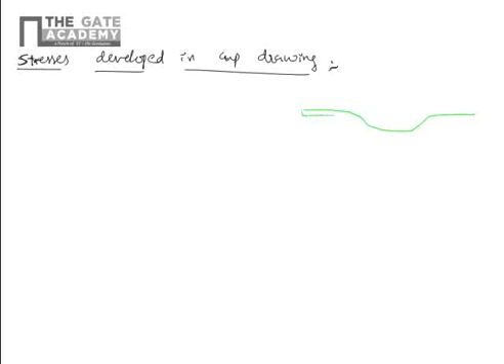Stresses developed in cup drawing at different positions of the operation. Suppose for example, I want to produce a cup. So this is a sheet, and this is a die.

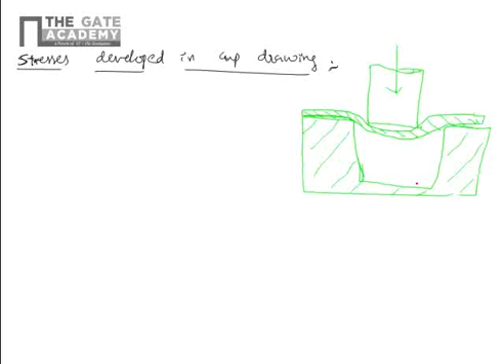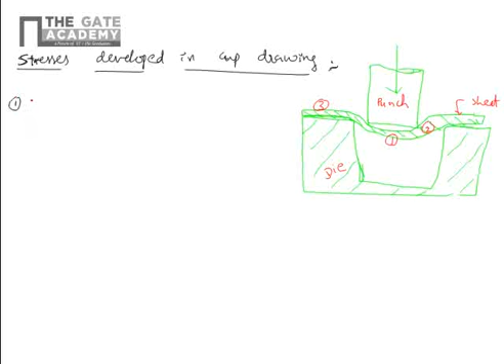It will give a cup. This is die, sheet, punch. So here there are three zones, 1, 2, 3. First zone is called zone 1, or area below punch.

So what are the stresses developed with blank holding force and without blank holding force? What is blank holding force here? Blank holding force is used to overcome, whenever you apply a force on the sheet, the sheet on the flange portion, which is the third number shows, this will lift up, it will lift upwards. So to avoid the lifting of the sheet whenever you do drawing operation, we use blank holding force.

External force is applied to hold the flange portion, not allowing it to lift out. If it lifts upwards, wrinkles will start forming. Once it is forming into cup shape, the entire wrinkles will be formed.

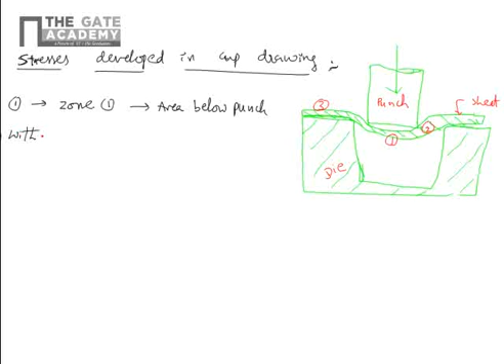So stresses induced in zone 1, case A, without blank holding force: if you are not giving any blank holding force on the flange portion and you are applying a load on the punch, then no stresses developed at region 1.

With blank holding force, what will happen? You are applying load on the punch and you are holding the sheet slightly, not with very hard force, slight force, just to avoid lifting the sheet. With blank holding force, then slightly tensile stresses will develop.

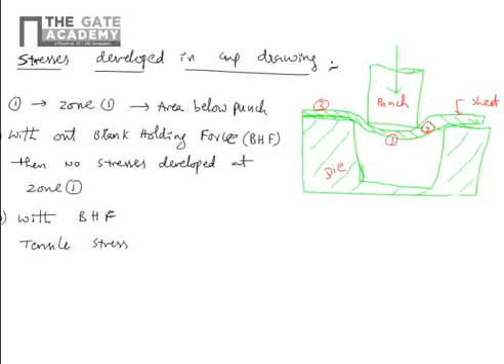Case 2, zone 2, it is called deformation zone. In deformation zone, without blank holding force, there will be tensile stresses. Because there, that is the contact area where there will be tensile forces. Elongation takes place, so tensile forces.

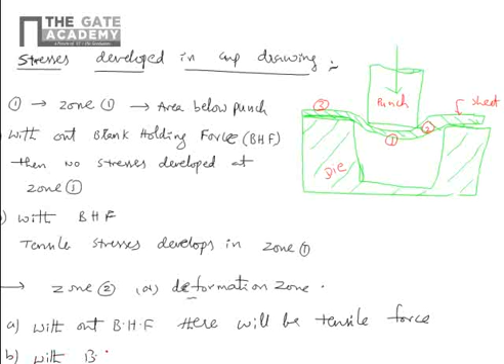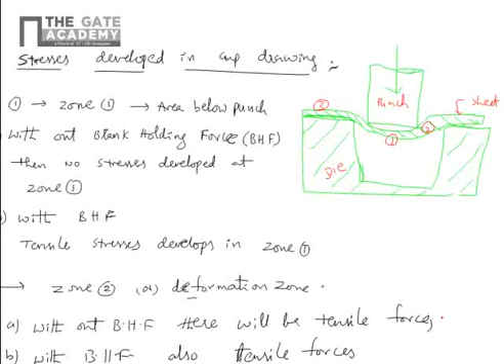With blank holding force, also tensile stresses or tensile forces. Instead of force, stress is better, I think. Tensile stresses, remember.

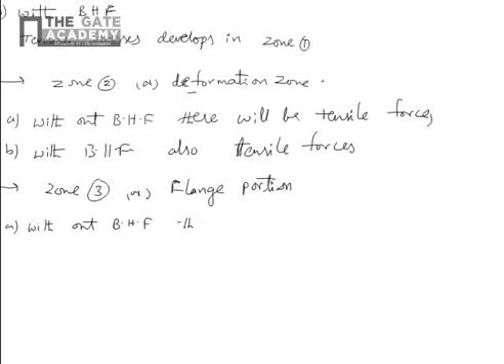Next, zone 3, flange portion, that is called flange. Without blank holding force, there will be no stresses.

With blank holding force, then both tensile and compressive stresses develop.

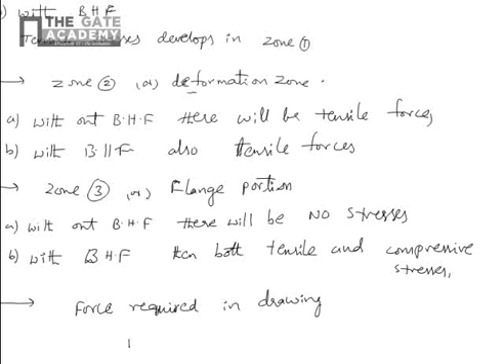Similarly, force required in drawing. We have studied that force required is equal to stress into area. Similarly here we do in multiple draws. We won't get a straight tall glass in one draw only. If you do in one draw, you need large force, because from big diameter to very small diameter you want to reduce.

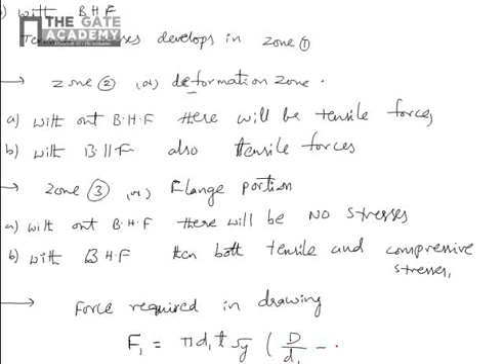So instead of that, step by step process we do, that's called draw ratio, number of draws, or step by step drawing. So your force required for first draw: F equals pi, d1 is the final diameter, sigma y is yield stress, t is thickness, d by d1 minus c. So d is the initial diameter, and d1 is the diameter of first stage, diameter of cup after stage 1, so draw 1. T is thickness, sigma y is yield stress anyway.

Similarly F2 means pi d2. C equal to constant for a particular material, constant to cover friction and blank holding force. So this value of C varies from metal to metal.

Similarly, work done, W1 equal to F1 into H1.

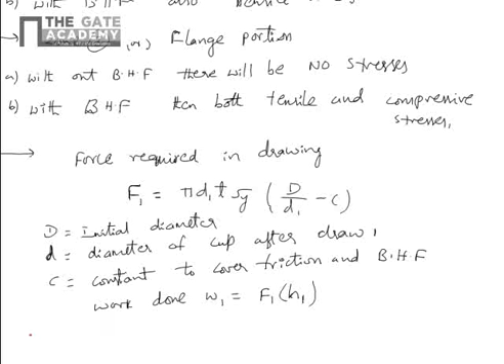So here how to decide the number of draws. So number of draws equal to capital D by final D, df, where df equal to final diameter. Then you will get a picture of how many number of draws you need to do to complete the final, to get the product shape, which is desired shape.

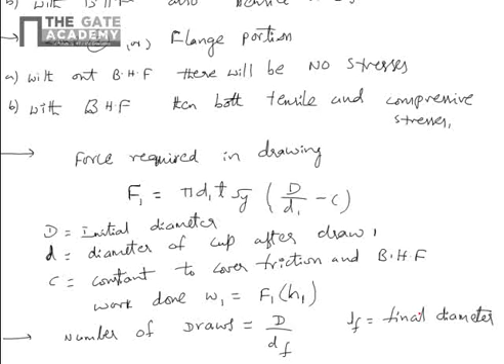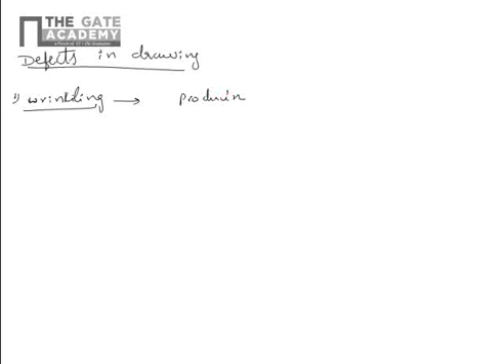So defects in drawing, as we have discussed the drawing operation, defects in drawing. First one is wrinkling. As I told you, that produces the wrinkles on the surface of the component. Wrinkles on surface of the sheet.

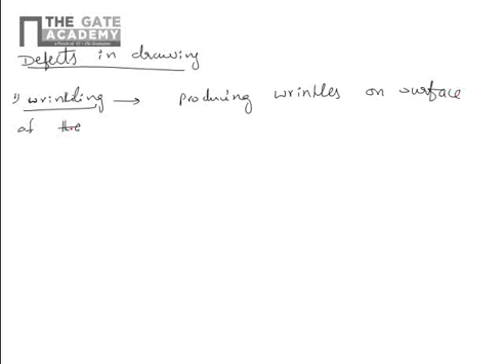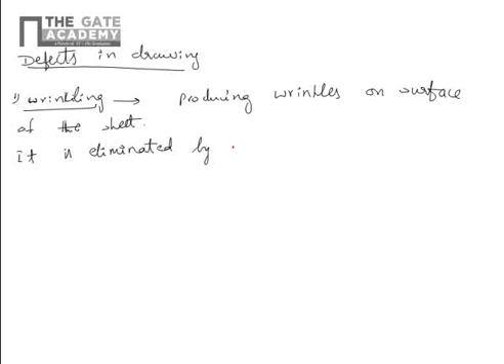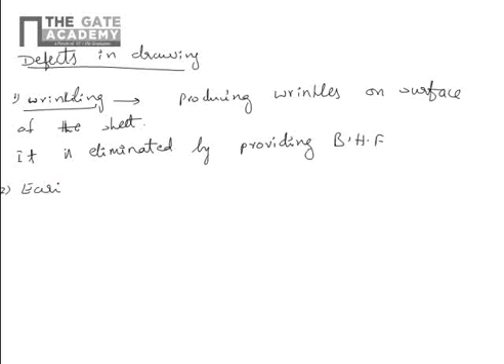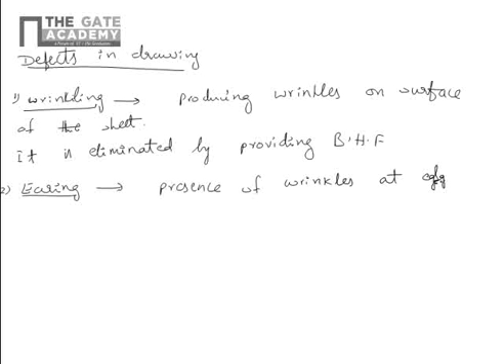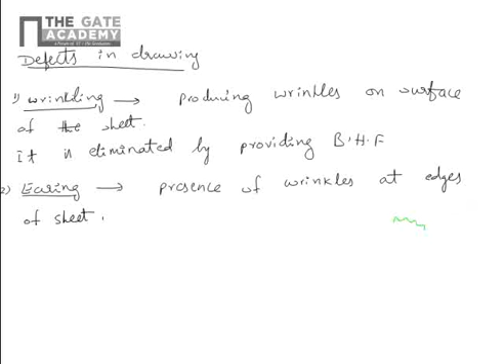So I produced a cup, but the circumference on the top of the cup has small wrinkles. It is called earing defect, due to earing defect.

Next topic is bending. Bending is one of the forming processes where stress applied is more than yield stress and less than ultimate stress. Bending is a forming process.

There are three types of bending: U bending, V bending, and edge bending.

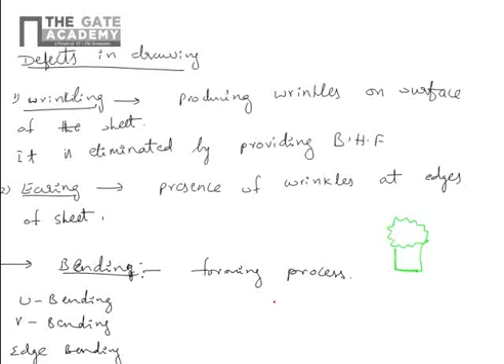In U bending, you use a die of U shape. This is a U bending die, U shape die you use. In the same way, instead of a curved surface, you use a V shape, that is called V bending.

In U bending, if you keep the sheet on the die, you need to prepare the sheet such that the final component touches the entire curvature. That's why surface contact takes place. But in U bending, more force is required.

So the surface contact: in V bending it is line contact, and in edge bending it is point contact.

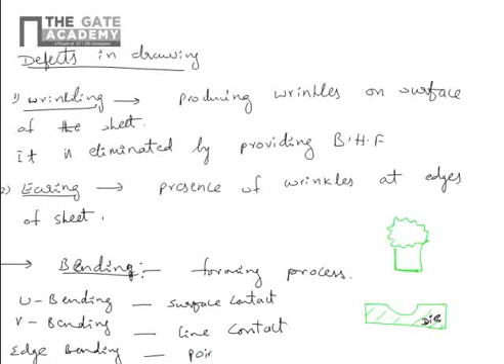So the force required, F U bending versus F V is to F edge, equal to 4 is to 2 is to 1.

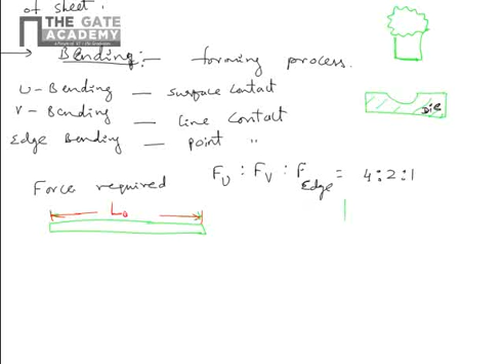This is about forces. And what about the actual length? Suppose initially it is of length L0, right? L0 is the initial length, and finally I got this shape of the component.

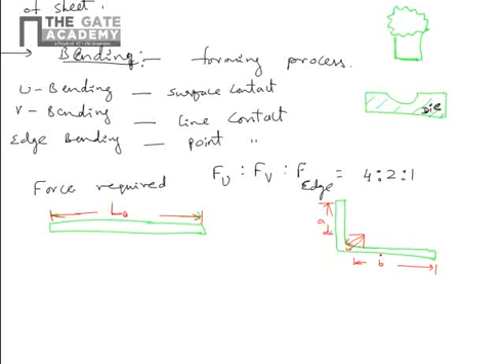T is the thickness of the sheet. L0 equal to A plus B plus B. B equals bend allowance due to curvature. So B equal to Rn into theta, where Rn is the neutral axis radius.

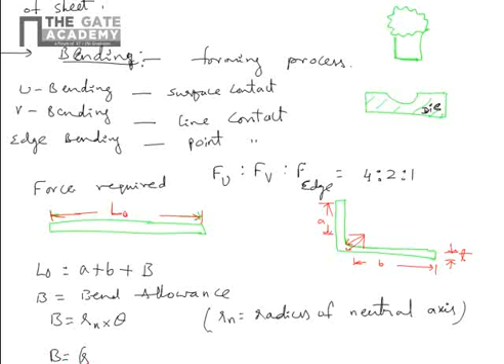B equal to R plus K into theta, where K equal to T by 3 if R is less than 2T, equal to T by 2 if R is greater than or equal to 2T. So substitute the formula, you will get the bend allowance. This is also important, bend allowance.

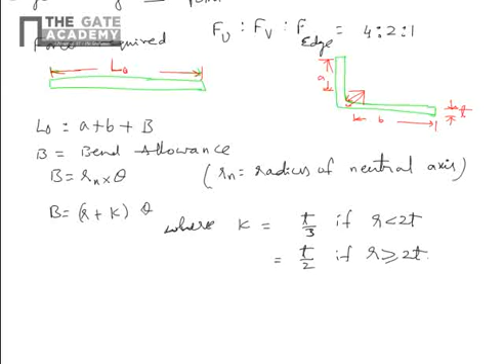Next, there are some other minor operations which we need to remember. The first one is perforating. We may have seen a sieve, where there are a large number of holes of similar size. This is called a sieve, and this process is called perforating.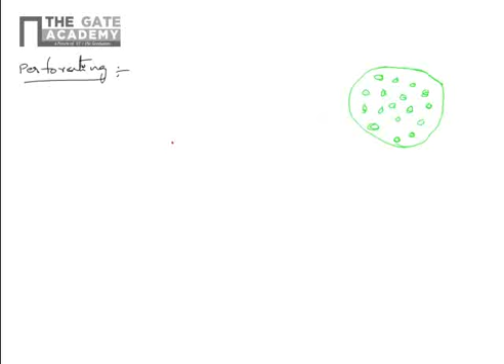Producing many number of small holes in thin sheet is called perforating.

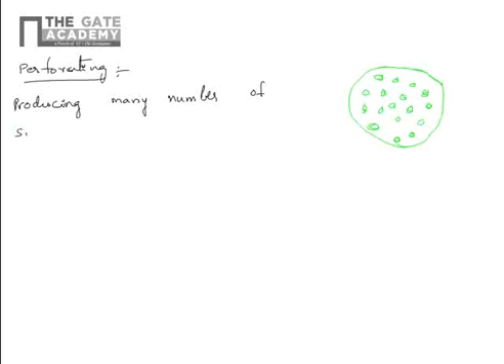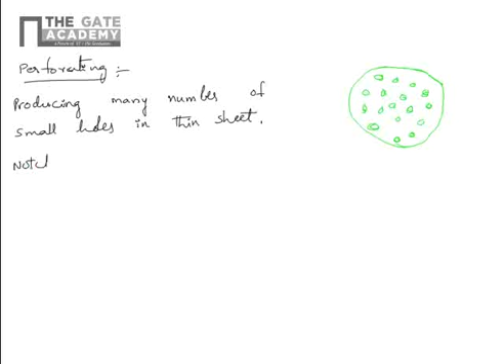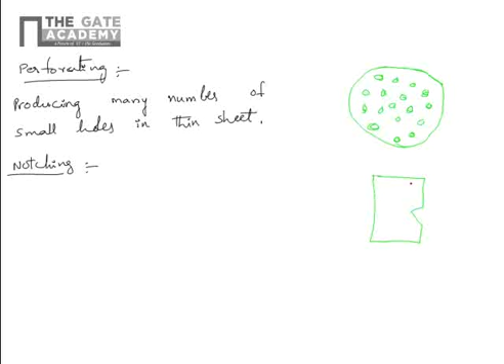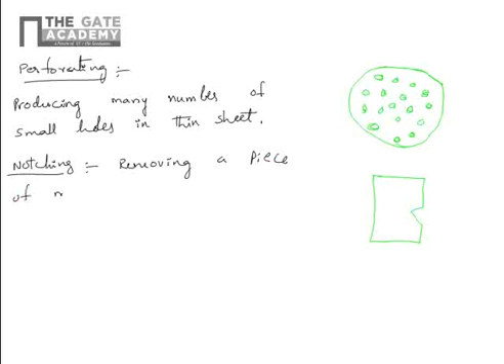Next, notching. Removing a piece of material from the edges is called notching. This is notching, removing a piece of material. It is needed for accommodation in lathe beds, and we use it there.

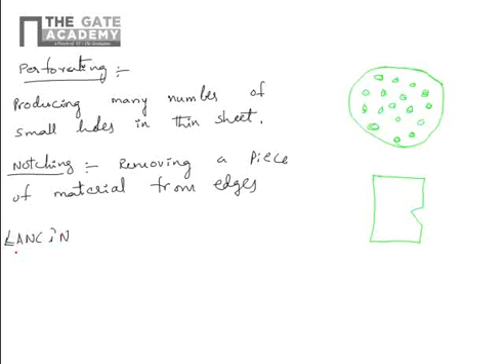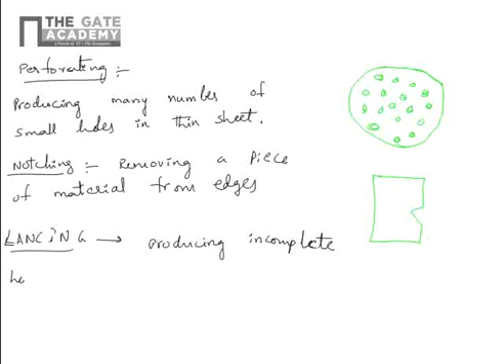Next is lancing: producing an incomplete hole. When you open a coke tin, you do an incomplete hole. It is a combination of forming and cutting operations.

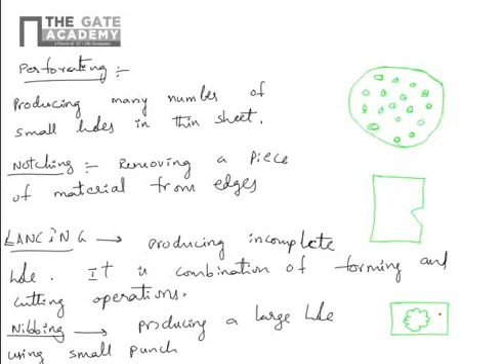Next one is nibbling: producing a large hole using a small punch, a large hole with a small punch.

Stretch forming: elongating the sheet by fitting it in between two fixed supports. So these are the few things, and we do 2-3 problems also along with question number 4.

GATE 2008, 1 mark question: In the deep drawing operation, blanks show a tendency to wrinkle up around the periphery. The answer is A: buckling due to circumferential compression, increase blank holding force.

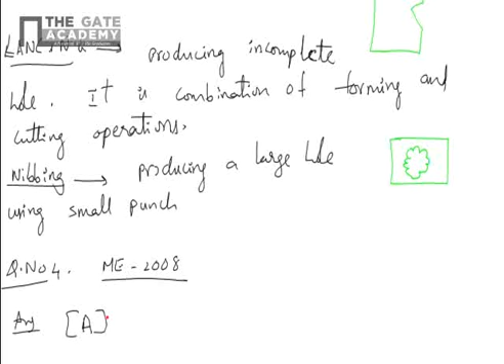So the most likely cause and remedy of this phenomenon: buckling in deep drawing cups causing a tendency of wrinkles is a defect avoided by blank holding force. So A is the answer.